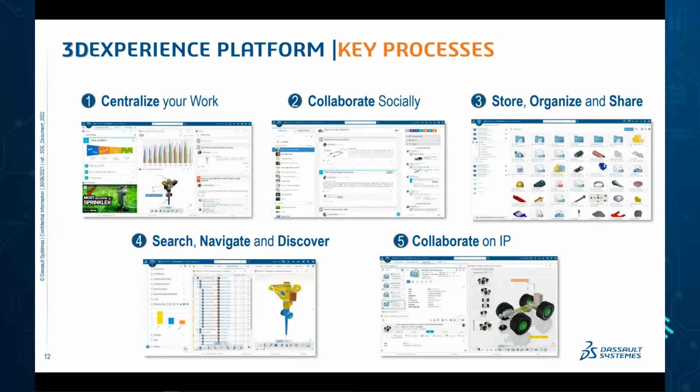But let's focus on how we can now leverage, for example, the 3D Experience to connect the data for simulation. We have been working to enable the connection between CST Studio Suite and the platform, in order to keep track of any changes during the design cycle.

In this way, you can run simulation on a virtual twin, and you can do it in an early stage of your design process.

As I mentioned, we have been working in the past to make the 3D CAD data from the platform available in Studio Suite. We did it for the 3D wire harness, but even for PCB, so you can upload a printed circuit board on the platform and then simulate it through CST Studio Suite, as well as even for electronic circuit behavioral models.

This year, we have been focused on adding material properties, accessing, for example, finite element mesh, but even having the possibility to use abstraction shapes.

Let's have a look at a simple, nice example showing how we can select the data that we want to import. This is a basic antenna substrate and ground that has some holes, for example, for the assembly.

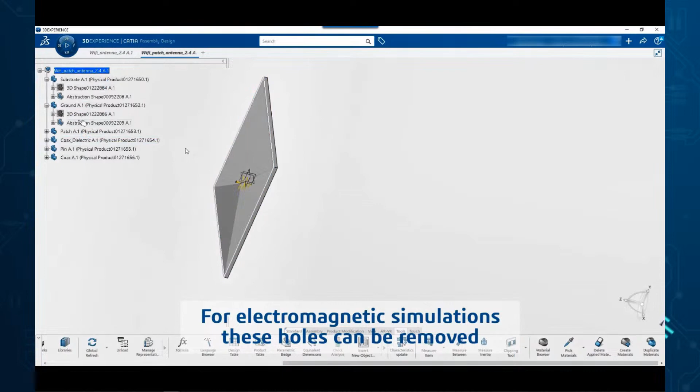For simulation, the holes are not necessary, but you cannot modify your geometry. You may be, as a simulation engineer, not have the right to do that. For this reason, we create a so-called abstraction shape.

An abstraction shape is linked to the original CAD data, but you can add on top of the original CAD data some changes, for example, to simplify the part.

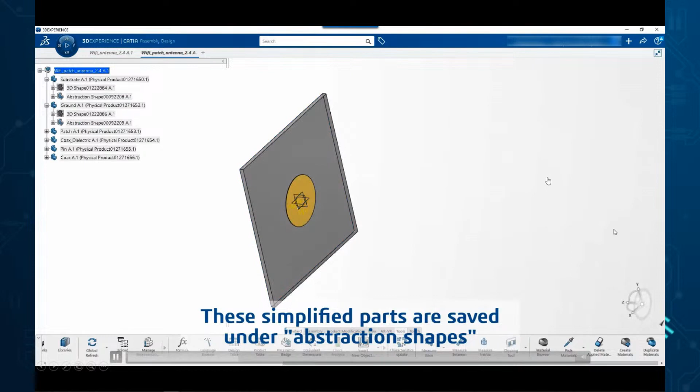On the platform, you can access the different materials. You can, for example, assign to the FR4, to the substrate, and so on. You can assign to the antenna—could be maybe a perfect electric conductor, or maybe a lossy conductor. As you can see, this can be done in a shareable way.

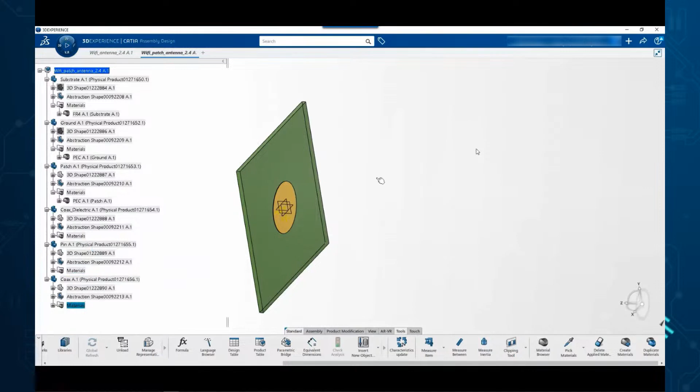Once this is saved, you or a colleague of yours can access that by loading the 3D shape into CST Studio Suite. As you can see here, you can select which parts you want to import and which part you don't want to download from the platform.

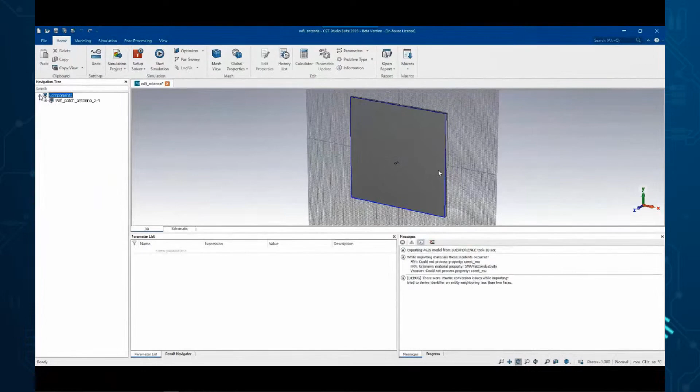So you are connected to the platform, you are accessing the data now—the material, the geometry is there. And of course, you can carry on as you are used to doing with CST Studio Suite.

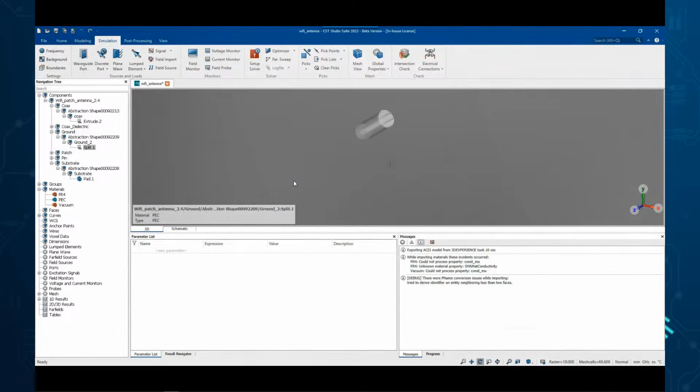You can now maybe select and assign a port, or maybe define first the frequency, assign the port, and run your simulation. So, as you know...

Once the simulation is run, in this case we can just speed up the video a bit. You can look at or watch the results either in CST Studio Suite, as you're used to, or this data can be uploaded back to the platform, and you can use some web-based results visualization.

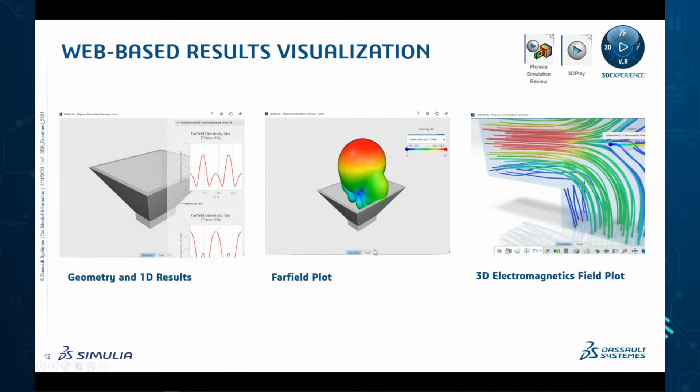We offer a bunch of apps that allow you to look at the results directly on the web. You can watch the geometry, watch the 1D results, but even far field plots and electromagnetic fields.

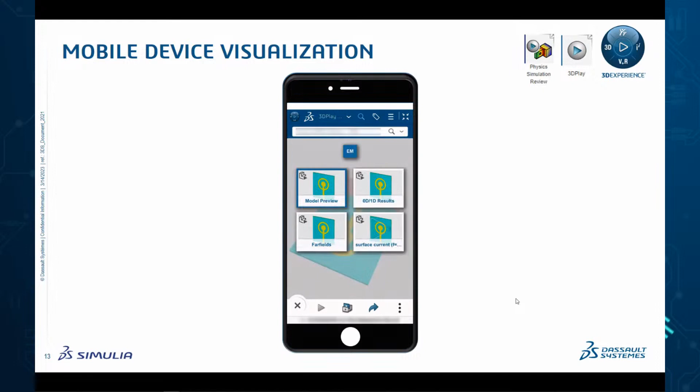These apps are not only available on the web, but even on mobile devices, like your mobile phone or tablet. As you can see here, we have a nice example with a basic patch antenna, where we can access 1D results, and even directly on your mobile phone access far field results.

But let's move now to the first topic, the first bunch of workflows that we optimized. Let's focus on antenna and microwave component design.

Nowadays, when talking about antennas, we are really focusing a lot on arrays. And I think CST Studio Suite is recognized for offering today the best array tools for designing arrays. There have been many updates in 2023, starting with the ribbon itself, which has a new layout.

We give the possibility to define subarrays as well. We have the possibility to better define the excitation in the ribbon and so on, but even to have a kind of parameterization inside the parameterization list—the possibility to select the element you want to simulate, and even to assign or not an enclosure model.

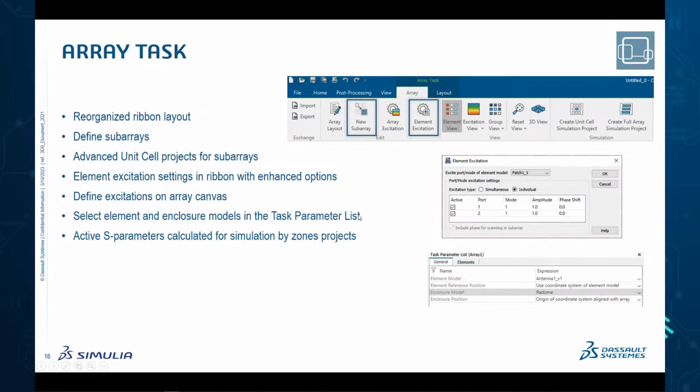But I think it's best to see that in action. We start with the Design Studio project that already has some enclosure and the two antenna blocks. So we create the array and import the layout.

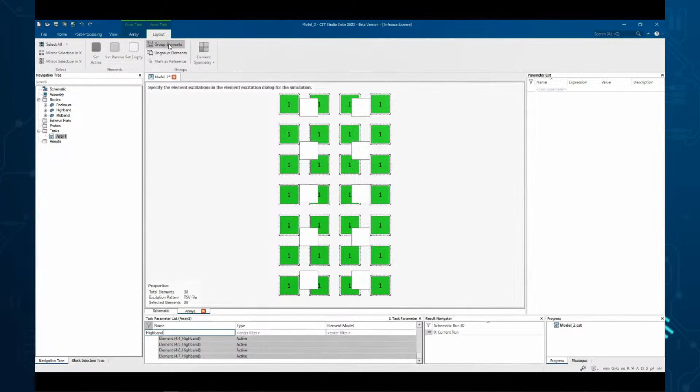Then we switch to the group view and select the multiple model. Here we can group the elements and then select a specific antenna model that is assigned to each group.

When moving to the element view, you can now specify the task in the parameter list if you just want to use one block for the moment. You also have the option to load an enclosure on the radome.

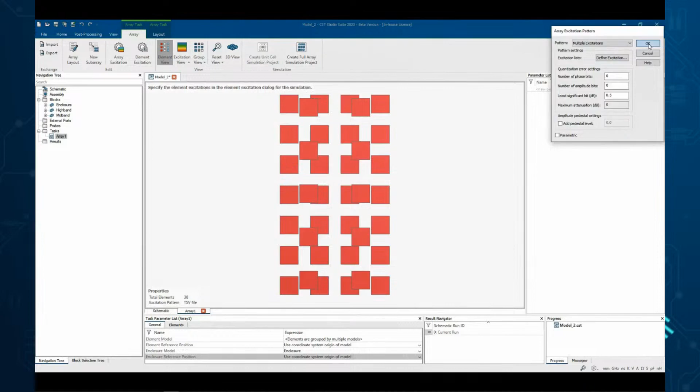So then we move to the excitation. First, we select multiple excitation lists, and afterwards we can decide which excitation list we want to use.

So then we create the full array project by selecting again the elements that we want to simulate. In a few clicks you get the frequency domain, which is the most suitable for that. The project itself has already defined the domain decomposition method, so you don't need to do anything manually - the domains are automatically created.

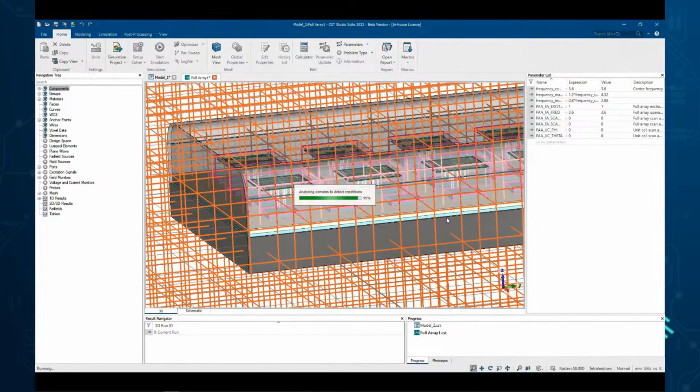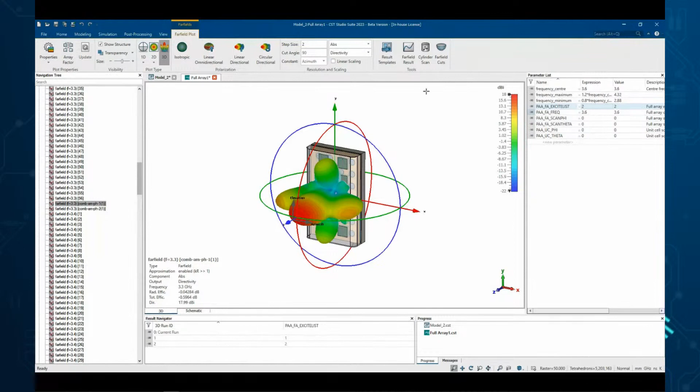So let's start the solvers. After the solver finishes, you have all the individual port results as well as the full array pattern reconstruction and post-processing. You can now switch to another excitation list by changing the index, and you can update the combined results template.

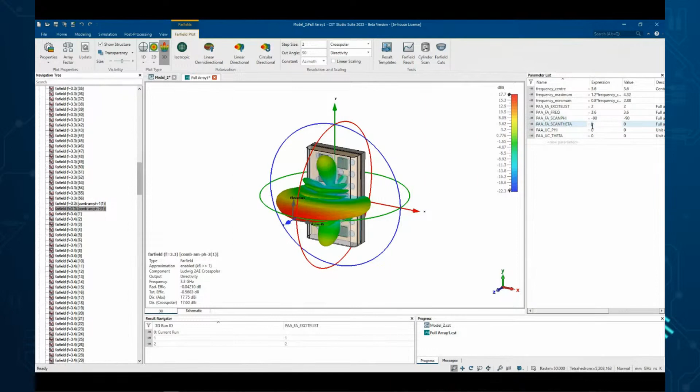And the pattern is updated with new excitation weights. You will also notice that there are now two patterns, so if I switch between co and cross polarization, this is actually a nice capability that you get. Everything is done as post-processing, so you don't need to rerun the simulation.

So we give the beam an angle and a tilt angle by changing the scan parameter, and then we can go back to the array task and take a look at the current excitation distribution as well as the phase distribution.

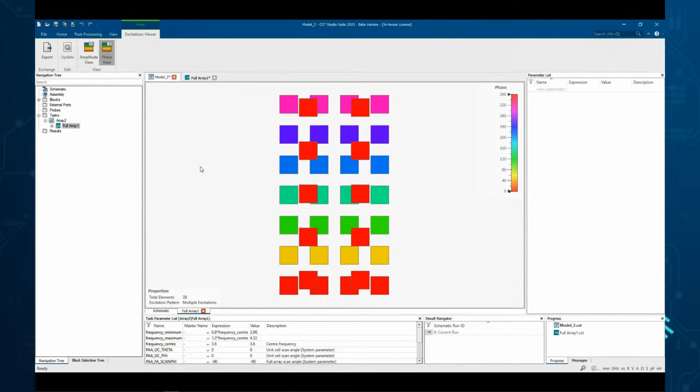I would say extremely complete, very attractive for designers, and in addition we shouldn't forget that we have the possibility to take already some predefined antenna. Our Antenna Magus allows you to start from a single antenna, but even to have some dedicated array pattern.

This year we added a new layout which is non-periodic, a sunflower array synthesis. Why is this helpful? Well, when you have periodic structures, you usually get a problem with the side lobe, which could be pretty high. For example, this is a classical Taylor configuration.

If you use a sunflower configuration, we can already reduce the grating, the second lobe - we get grating suppression - and this can be even improved with the sunflower configuration of the antenna.

Antenna is not the only, let's say, the most important device for communication - you need to have filters and so on. Our Filter Designer 3D, I think, is the best-in-class tool to not only create an initial geometry of the filter, but even to optimize it.

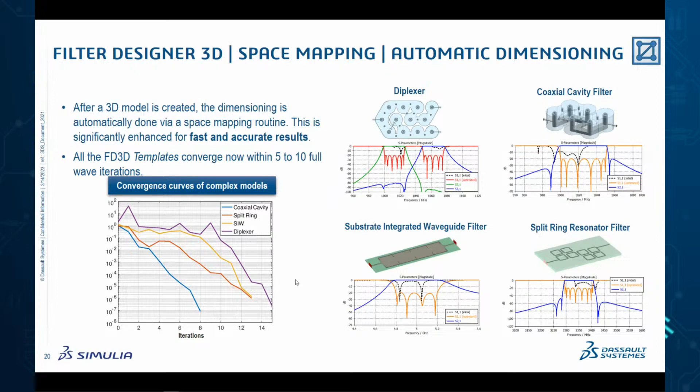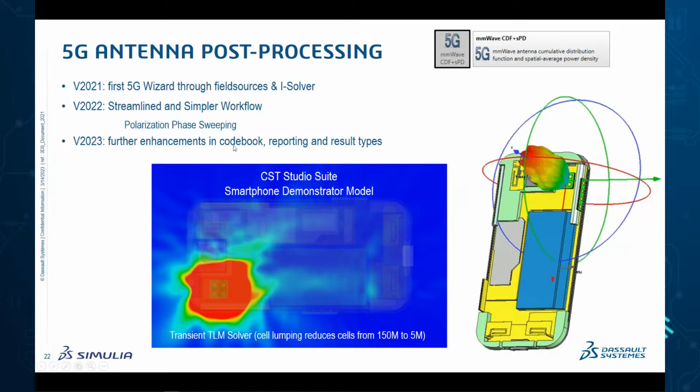Well nowadays, the most important standard is definitely 5G, and to support this we have been developing dedicated processing over the last 3 years. The 5G Wizard has this year an enhancement in the codebook with better reporting and result types.

For example, now you can calculate the equivalent isotropic radiated power, which goes directly into the codebook, as well as the new result template, total scan pattern, which offers a switch of the antenna parameter in the definition dialog. In addition, we have improved the capability to report and offer summary information.

When talking about electromagnetism and radiation, we should not forget that sometimes we need to evaluate SAR, or even do deeper investigation of human exposure to electromagnetic radiation. For that, I think we are the best in class to provide a human model library.

This library is updated every year, offering a variety of different human bodies. Bear in mind this is done in collaboration with the German Cancer Research Center, which has a Human Model Creation Project. These are very detailed models coming from MRI scans, and they are available in the library extension.

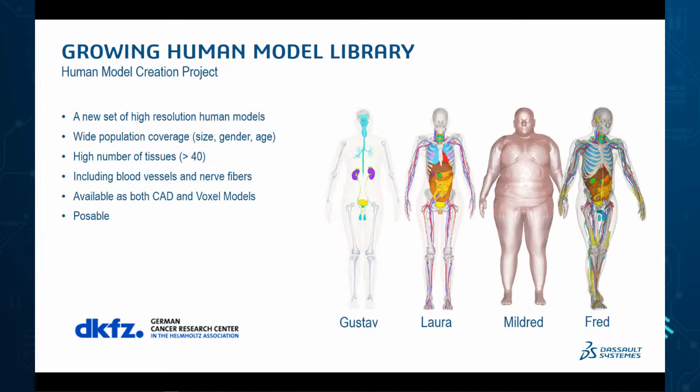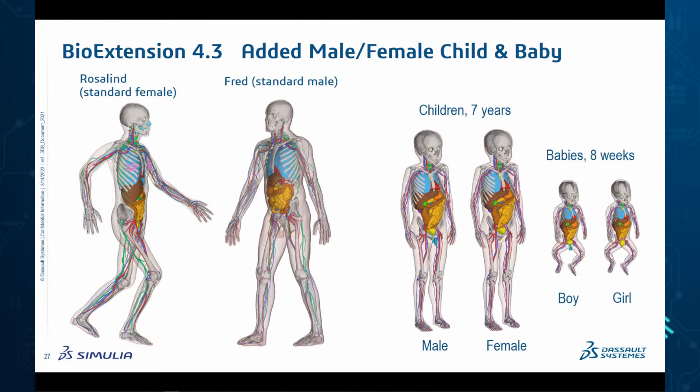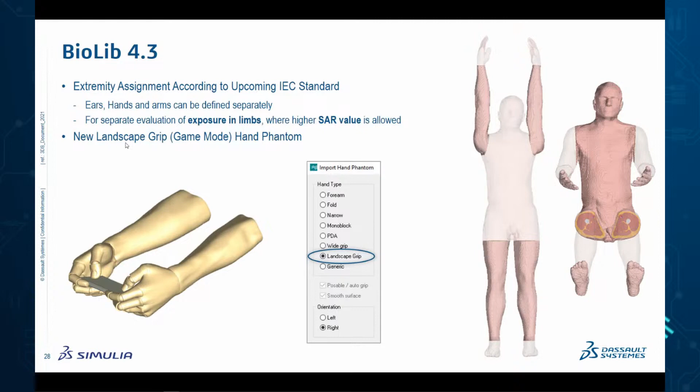This year we added the so-called landscape grip, a kind of game mode that I think is necessary for a proper SAR evaluation. So we have seen how the communication system is designed. We have focused until now on the antenna and filter design, but we haven't seen yet how a network can be planned as well.

I will not talk about public networks, the ones where your mobile phone is connected, but the emerging network, which is the private network.

Dassault is extremely engaged in these topics. I would suggest you visit our LinkedIn page, the SIMULIA LinkedIn page, where we have plenty of demonstrations of our capability. Today, Dassault Systèmes is the only company able to offer the digitalization of infrastructures as well as physical simulation on the 3D Experience platform.

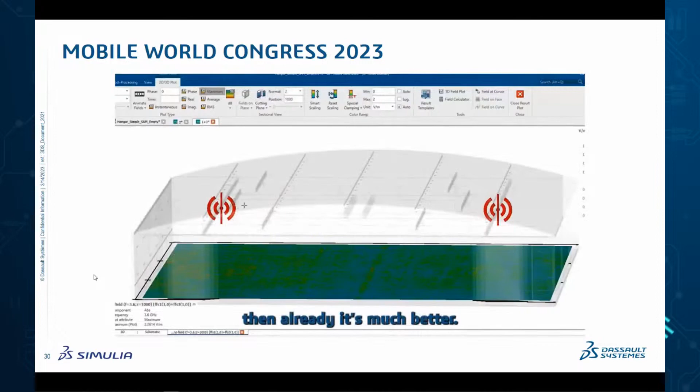Let's assume that you want to create a private network in your company. First, maybe you have to scan, or you already have something that represents your company, your hangar and so on, so that the layout can be reconstructed.

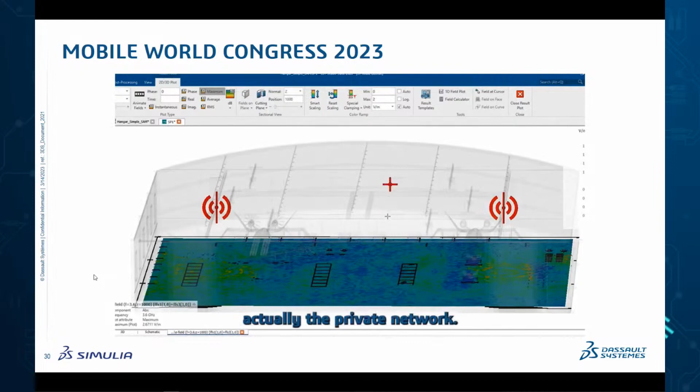This layout can then be imported, for example, into CST Studio Suite, and we can do different analyses. We can place one antenna, two antennas, to check whether the coverage is good enough. You can increase the complexity, and maybe with three antennas it's fine.

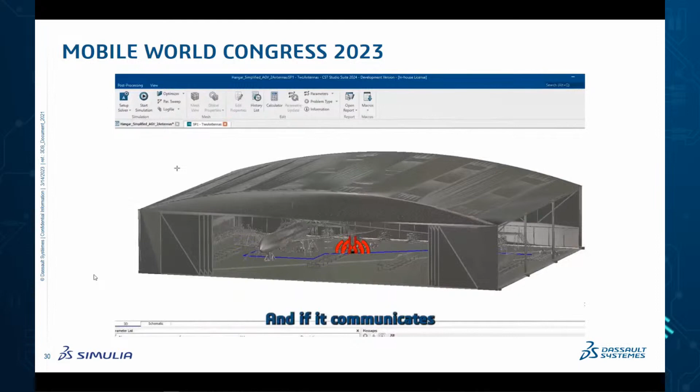But what about if you introduce more details, like a robot? Is this robot able to communicate with the network? In this case we are talking about a real-time network, since you want to really move the robot in real time.

This is possible already today on the 3D Experience platform, on which CST Studio Suite provides the simulation for that. That's why we are working on enhancing more and more the capability to represent a complete scenario, not just a simple model or component like an antenna, but a complete scenario like this.

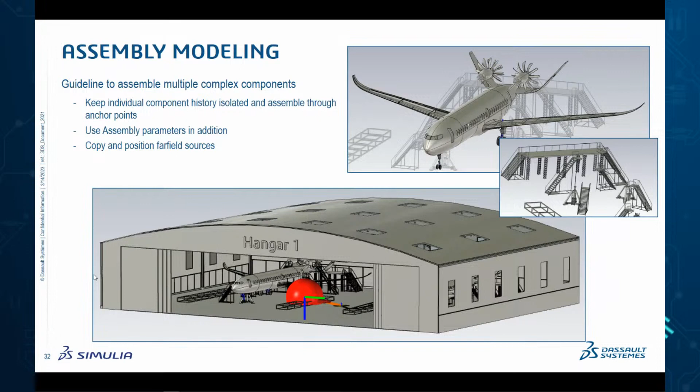You can really have the possibility to represent this in 3D, but even to have a corresponding schematic. Why do we need this double representation? Well, because you want to have a way, from one master, to extract multiple scenarios which can be derived.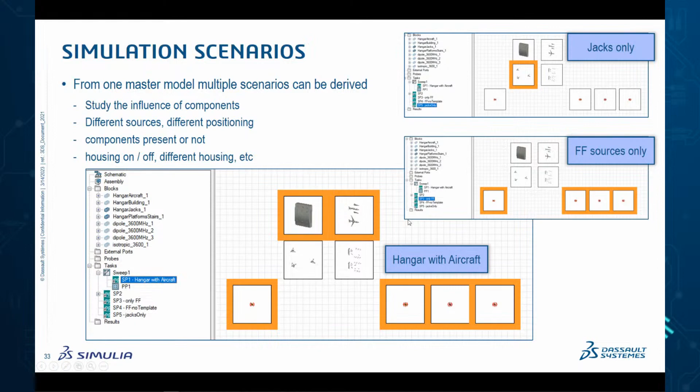You may want to have just the jacks, or maybe only the far field that you want to simulate, or you want to consider the hangar with the aircraft. You simply click on the schematic and you create your 3D structure for the simulation.

Which solvers? Well, definitely for this kind of application, our asymptotic solver is the best in class that the market and technology can provide. It's an extremely fast solver for antenna placement, but even for radar cross-section, for example, and we can support GPU with the latest hardware acceleration.

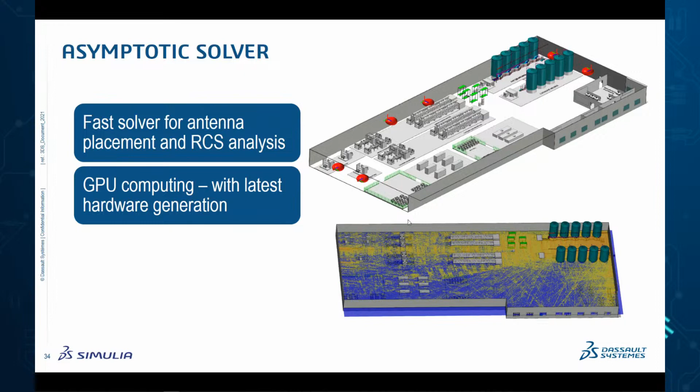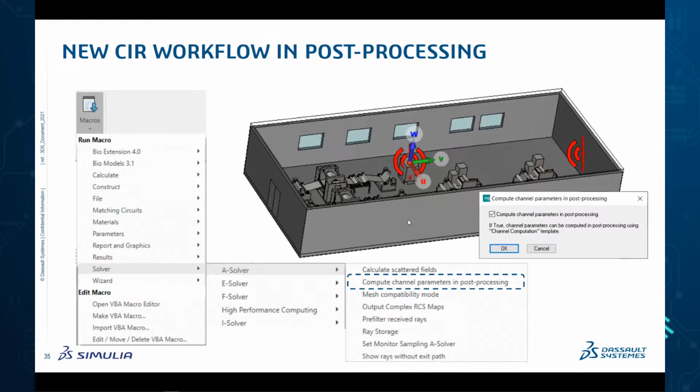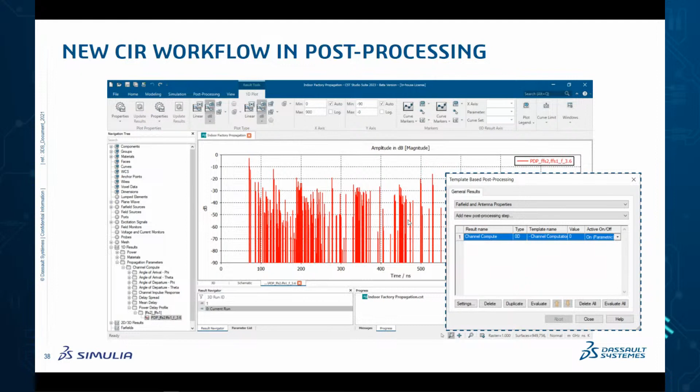Important in this case is the definition and analysis of the channel's impulse response, the CIR. For these reasons we have been working on optimizing and improving the simulation workflows. You can find dedicated scripts that allow you to evaluate that, as well as dedicated post-processing which helps you evaluate the CIR as a combined result. So, very fast and very accurate at the same time.

If we stay in the area of communication and detection systems, we have to consider two things. Antennas are definitely the major actor for that, and we have analyzed that. But if you want to evaluate your antenna in an operating way, you need to evaluate it, for example, on an aircraft, or maybe on a modern vehicle like a car or ship.

That's why it becomes important to have a bunch of solvers that allow you to choose the right one. Maybe at the end of the day, the best way to speed up the simulation is to choose the right solver. But sometimes it's not clear, or there isn't a single best solution for that.

That's why, for many years, we have decided to hybridize them. You don't need to choose one solver to solve everything; you can choose, for example, a model that requires very fine and accurate meshing, and another that considers the whole platform, which may require simulation with another solver technology. In such cases, our hybrid solvers come to the rescue. They can easily combine multiple solver technologies to efficiently handle electrically large structures, and they offer both uni- and bidirectional solutions depending on the simulation needs.

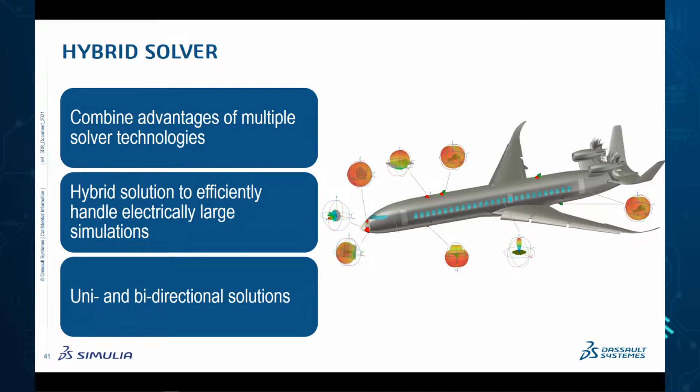In version 2023, we have unified the hybrid solver task setup to get access to the speed of the unidirectional workflows, while keeping the robustness of the bidirectional workflows. The user can easily choose the coupling type from the hybrid solver task parameters list. The coupling is realized using the near fields.

In addition, we now have the possibility to use the hybrid solvers in combination with the schematic. Sometimes when you have an antenna, you need to have a matching network together, and now we can do this with circuit simulation. So we can now hybridize matching networks with 3D inside the hybrid solver. I think that's most likely a unique tool offering.

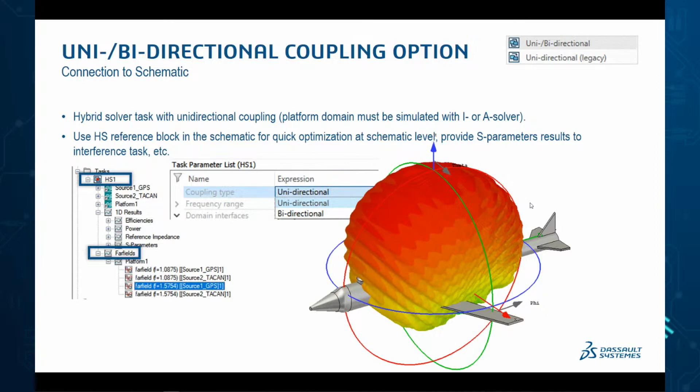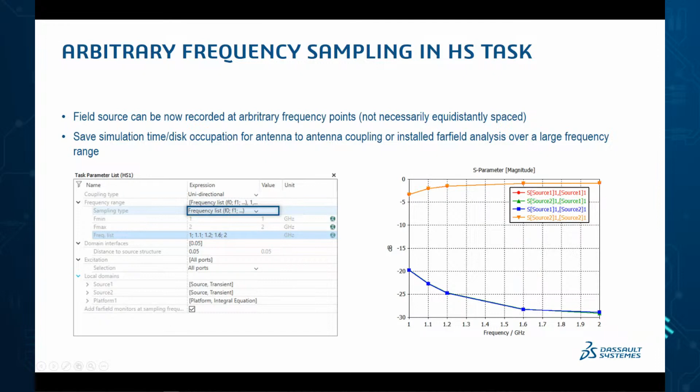What else have we improved for the hybrid solver? Now the field source can be recorded at arbitrary frequency, not necessarily equidistantly spaced. This saves simulation time and disk space for antenna-to-antenna coupling or installed farfield analysis over a large frequency range, since you have much better control over which frequencies you calculate. For example, you may want to refine a particular band in comparison to others.

As I said at the beginning, thanks to the 3D Experience platform, we are able to write dedicated apps which are industry specialized. The antenna placement app, part of the 3D Experience role, is the first kind of app we have developed. It's fully integrated on the platform, so it uses the same data format and directly accesses the CAD model available on the platform itself.

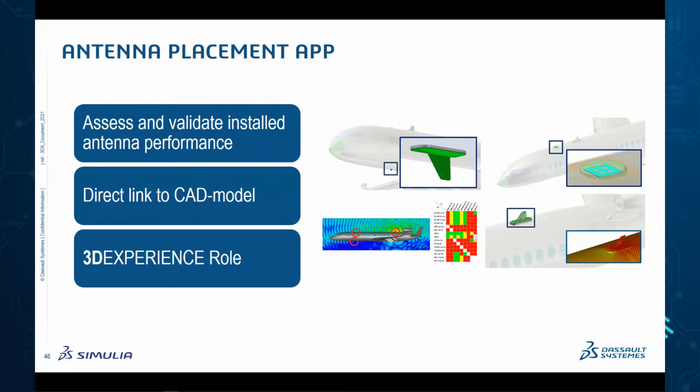This year we have expanded the app with some important features, for example multiple antenna analysis and the coverage test. In addition, we added the possibility to import the airframe, or maybe a vehicle, could be a car, directly as a mesh, so you don't need to remesh that at all.

Let me show you a few seconds of video of how this works. The antenna placement app is available on the platform, on the 3D Experience, so you can import your aircraft, in this case done as a mesh. The antenna is a CST project that you have uploaded to the platform before.

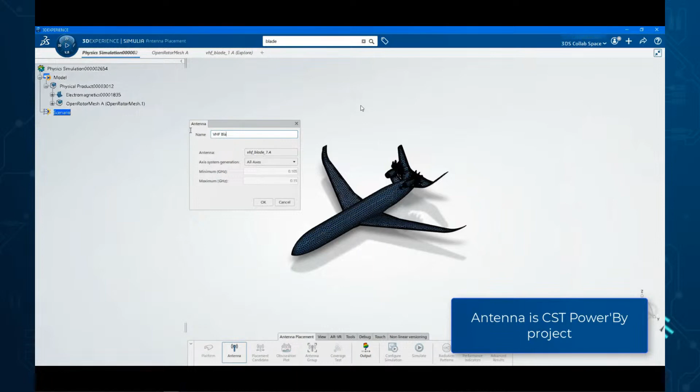You can use different possibilities to place the antenna in different positions, and then create different placement candidates, which can be swept afterwards. You can either position it interactively, as you have seen before, or by defining the position by coordinates.

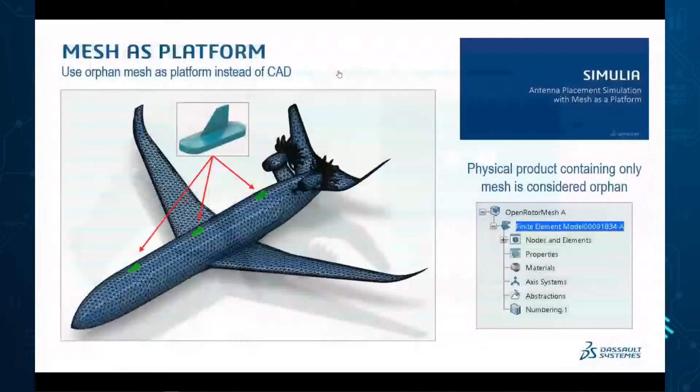What else have we improved? We already had the possibility to define the obscuration plot before. This shows where the antenna is radiating well, and where the platform, in this case the airframe, is causing shadowing of the antenna itself.

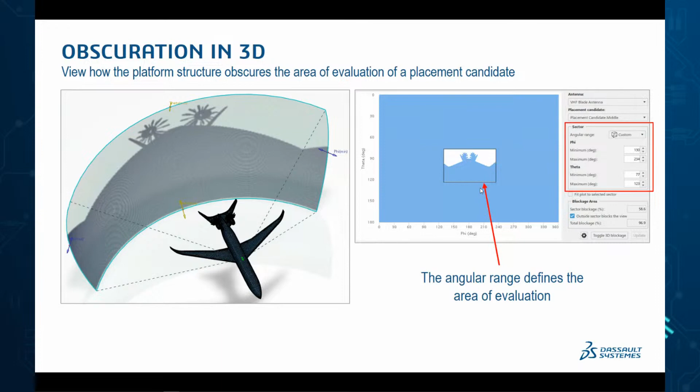We now have the possibility to define a smaller angular range to be more precise in some areas. That's related to the antenna placement and antenna-to-antenna coupling. But this is sometimes not enough to determine if your system is working, because we have to consider the full RF channel.

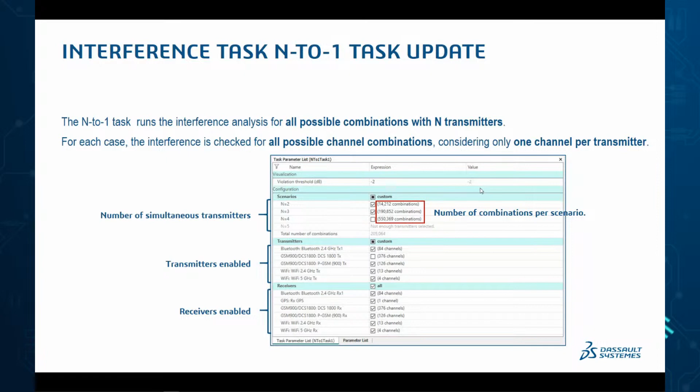To do that, we have our interference task, which provides the possibility to combine the antenna-to-antenna coupling with different RF modules. For 2023, we have intensively worked on the N-to-1 task for the interference task. What does the N-to-1 task mean?

You start with, for example, two antennas transmitting which are interfering with one receiver, or moving to a second receiver, or you can choose another two antennas which are then interfering with receiver one. We can even choose three antennas with all possible combinations with this transmitter, and now all these combinations can be done automatically.

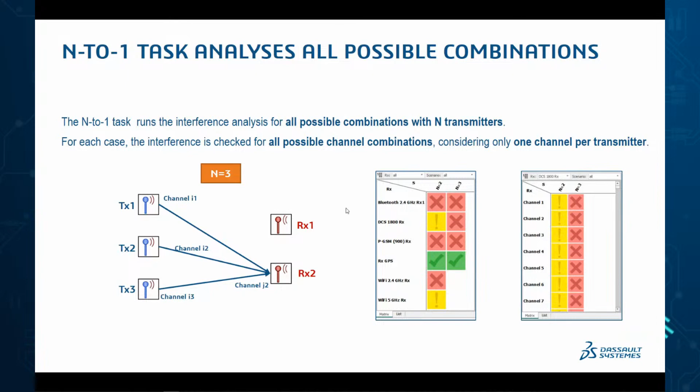For each case, the interference check considers all possible channel combinations, with only one channel per transmitter. So at the end of the day, you can end up with a large number of simulations, but we have further improved the efficiency of the single simulation. It now uses much less memory than previously, as we can see in this example. We drastically reduced the amount of RAM necessary, and even the total simulation time, by up to a factor of 10 in many cases.

So we are able to provide, at the end of the day, a full range of tools for antenna design. When putting the antenna in the array, we can then do the private network planning.

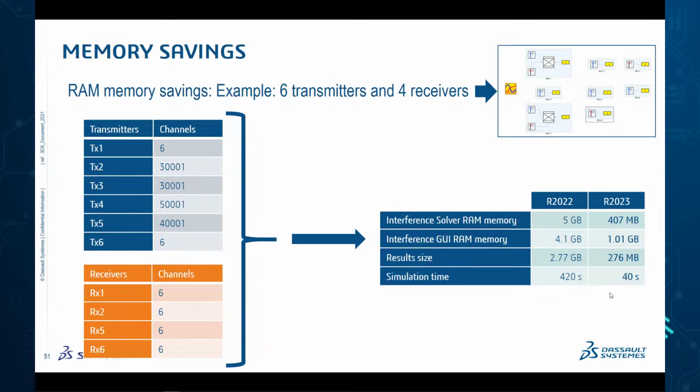We can do antenna placement for a full communication system design by having the interference task to really have a complete analysis for that.

Now let's move to another fascinating chapter of what we can provide: electromagnetic compatibility. We are recognized as technology leaders in electromagnetics. I think for at least a decade, we've been able to solve problems that our competitors are still struggling to do. The focus is not only on enhancing the technologies, but even enhancing the workflows to smooth how to set up an electromagnetic compatibility issue, which usually tends to replicate a measurement setup.

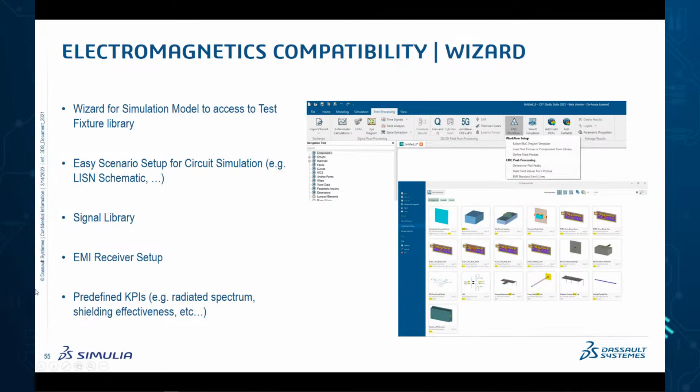That's why we provide, released this year, a wizard. You can go either on the 3D or on the schematic part, and you have a button - internally it's called the EMC button - which gives you a step-by-step tutor that tells you what you have to do. You start from, for example, a template. You can access a library where you have not only 3D models, but even some scenario setups, for example with the LISN available. In addition, we can provide a signal library and even some EMI receiver setups.

Let's see this a bit more in detail. You start with EMC standard limits. You can use some predefined EMC common standards, and this gives you a mask in the results that you can use afterwards to verify your compliance. You can use an interface to mimic the EMI receiver for easy post-processing, and you can easily compare results across different technologies.

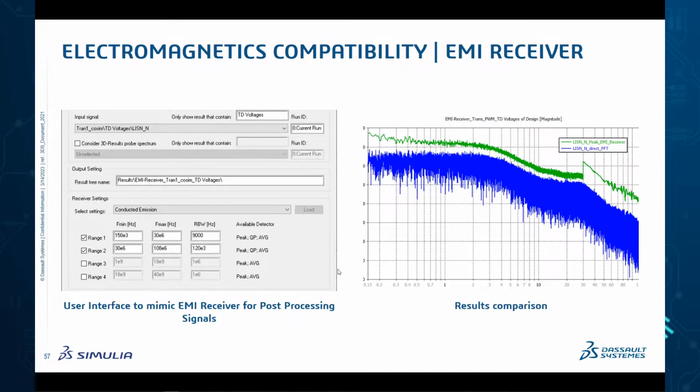When talking about EMC, of course we are talking about electronics and PCB. I think we are really number one in offering ECAD MCAD collaboration, and this year we have enhanced the schematic part as well. So when you import from ECAD - could be Cadence, Mentor, Zuken, Altium, or ODB++ - we are now able to automatize the setting of the circuit on the schematic.

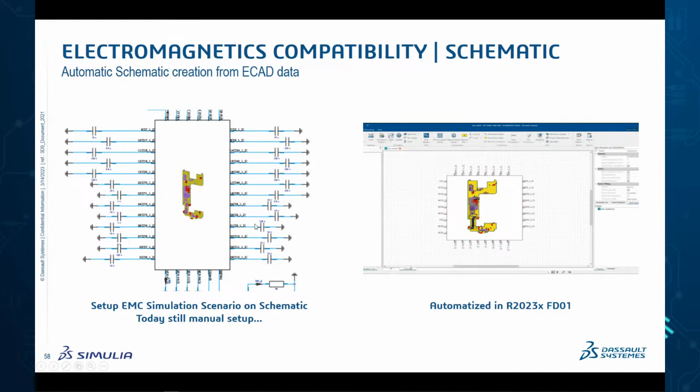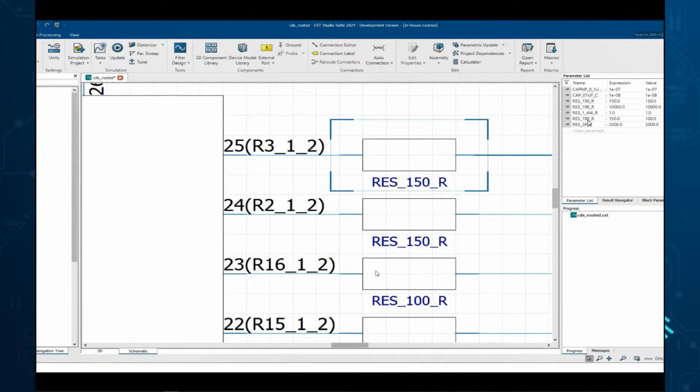On the left side, you see a typical EMC scenario which needs to be done manually - not anymore. Starting with a 4-port block, you have your classical CST block on the CST schematic. The lumped elements, for now limited to lumped element RLC, are automatically placed even parametrically, so you can really do a parameter sweep.

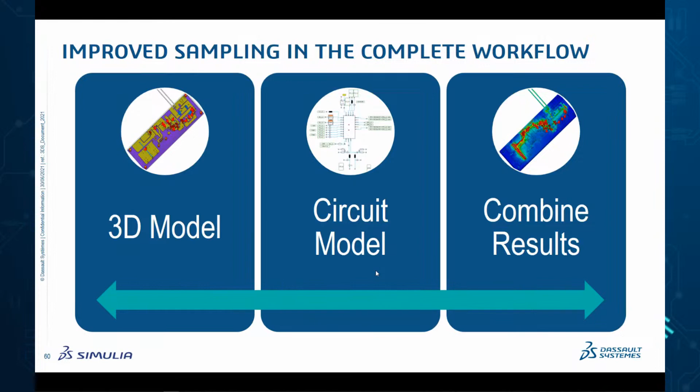We worked a lot on sampling. When moving into electromagnetic compatibility, we usually use digital signals for excitation, and therefore we have to switch often from time domain to frequency domain. Sampling is important, and we have unified the sampling whether you have a 3D model, a circuit, or combined results. When you start with a 3D model, we usually apply a logarithmic sampling at low frequency, and we even try to add some frequency evaluation points at 1 Hz to be very accurate at low frequency.

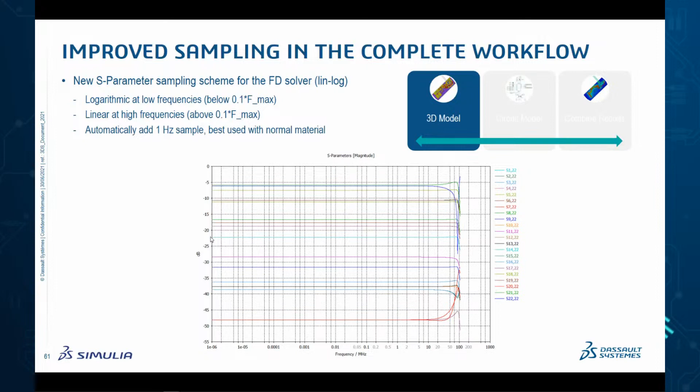Now, when moving to the circuit, we do not resample anymore - this is important, so we keep the same accuracy when doing the vector fittings in Design Studio. We offer new vector fitting settings for the blocks themselves in Design Studio.

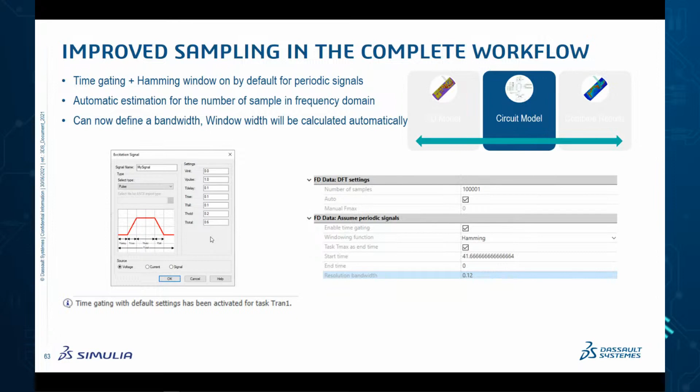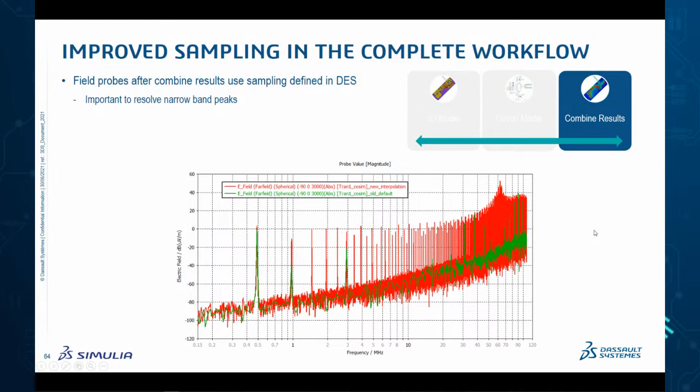When you do time gating, or apply different windows to do the time to frequency domain transformation to calculate the Fourier transformation, we automatically estimate the number of samples you need for a proper evaluation of the peak. Why? Because at the end of the day, these peaks can be quite narrow, and if you don't have an intelligent way of sampling, you may miss the peak or create aliasing. This is a classical problem for both simulation tools and measurement systems, and that's why we've worked a lot this year to make this more stable.

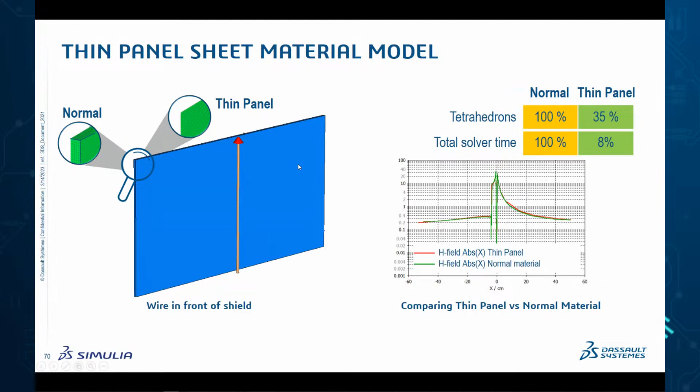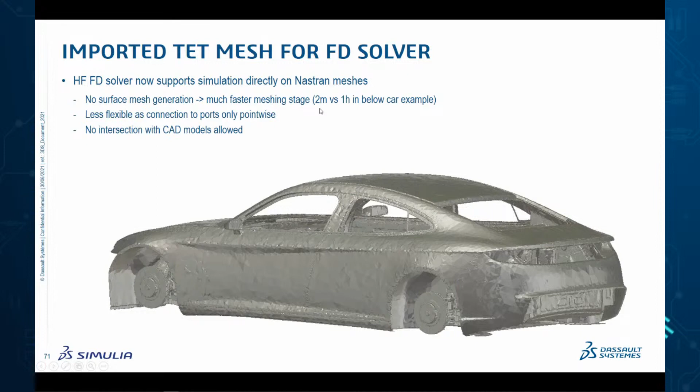Regarding the frequency domain solver, I want to mention two features available since last year that have been made more stable. One is the thin panel, which allows transparency at low frequency for electromagnetic materials, and the possibility to import tetrahedral mesh directly in the frequency domain solver without needing to remesh. In this case, as you recall, this goes from two minutes versus one hour that it took before. We still have some limitations, but we're going to remove those in the next service pack.

When talking about EMC, never forget that cable is usually not a source of interference, but they transport the interference from one point to another of the system. What we did, it's a long time, or well, a multi-years project that unified the way that cable excitations are defined. So it's actually now the same.

So we have a port for cable, while in principle before we were just defining pins. And for you, you can now run cable simulation with true transient simulation directly in 3D without accessing the schematic setup. So you can really do this kind of 3D plus cable simulation in a very efficient way. We reduced the number of pins afterwards on the schematic part, but you can really streamline your workflows by using distributed computing.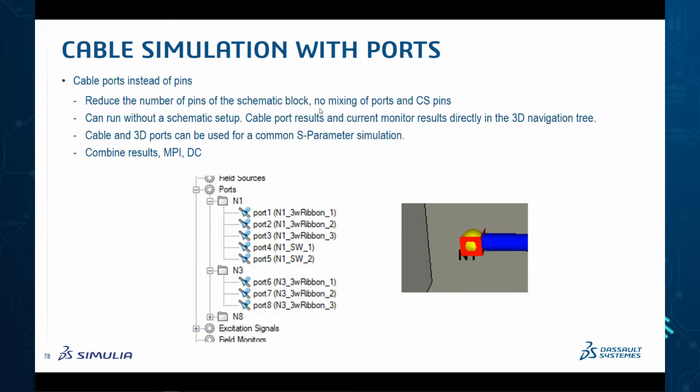You can use combined results, and you can use MPI to speed up your simulation with Cable Studio. So we really streamlined the workflows. There is no difference anymore how Cable Studio and the Microwave Studio parts are now working together. But if you really want to go to an extremely high level, high accuracy, or even set up a thermal analysis, we have a functionality to create 3D cable from the Cable Studio information that you had before.

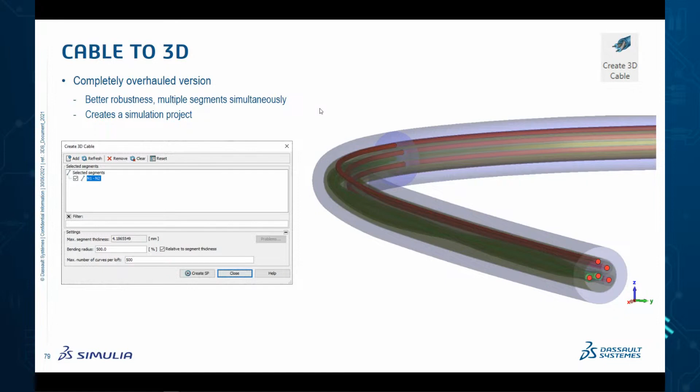Let's move to the almost last topics for today, which is the low frequency and the electromechanical device design.

As you know, our flagship product for the low frequency application is Opera. Opera joined Dassault in 2018, and we have been working every year to integrate more and more Opera inside CST Studio Suite and on the platform. In 2023, we are now able to install Opera through CST Studio Suite, so you don't need to have two different installations. This has a lot of advantages.

So you have a unique license server. You have a unique installation location, but maybe that's the most important thing: now you have an update manager so that every service pack is able to update CST Studio Suite and Opera. So that's a very good way to leverage the best of our tools.

But we went a step further. Opera is the recognized best-in-class tool for low frequency, especially for magnet simulation. And now we can find Opera solvers inside the CST Studio Suite. So that's the CST Studio Suite GUI. Even the electromagnetics engineer can offer that.

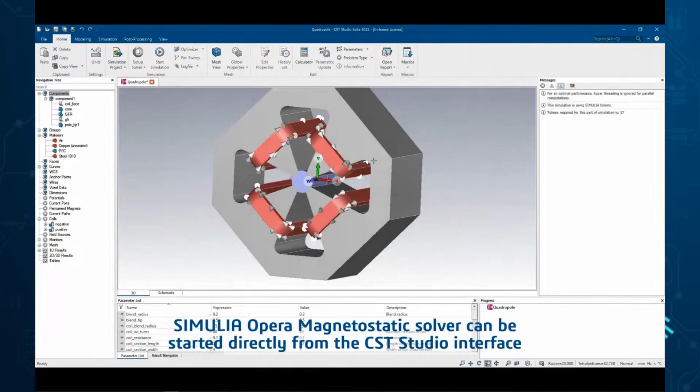We leverage the best-in-class technologies for magnet simulation. You can see this is the mesh, still in CST Studio Suite. And if you go to the list of solvers, you will find Opera, the M-static for starting. So we start, and after the end of the simulation, the results will be available in the CST Studio Suite interface. That's fantastic.

So we are going to offer more and more solvers in the near future, but I would say the big step is to really unify in one single GUI the best solution that SIMULIA can offer for electromagnetics.

But we continue to develop our capability, for example, for induction machines. We added a few new features to enable the simulation. The main problem for induction machines is the fact that, due to the initial transient, there is a slip between the stator and the rotor field, and that makes simulating the induction a challenge. First, the time constant is not known a priori and depends on the operating point, and second, the simulation in 2D needs a field circuit coupling, as can be seen when looking at the typical squirrel cage rotor.

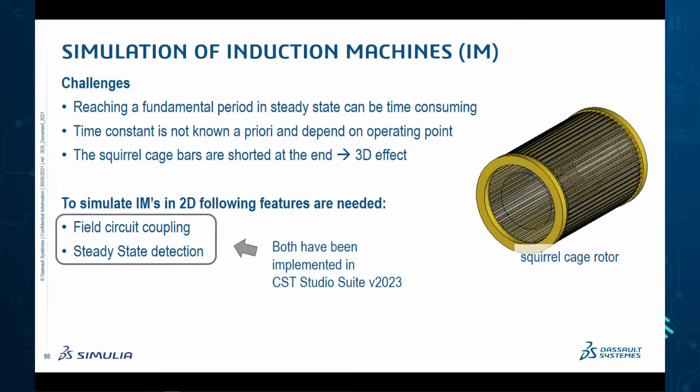What we did - we addressed both challenges in 2023 by developing a field circuit coupling and an automatic steady state detection. So as you can see here, you can couple the cage with a schematic, so we see a circuit with a 3D bar squirrel cage rotor. The vertical bars are simulated in 2D FEM, including the right source for that, and your horizontal segments represent the end rings, which live on the circuit side.

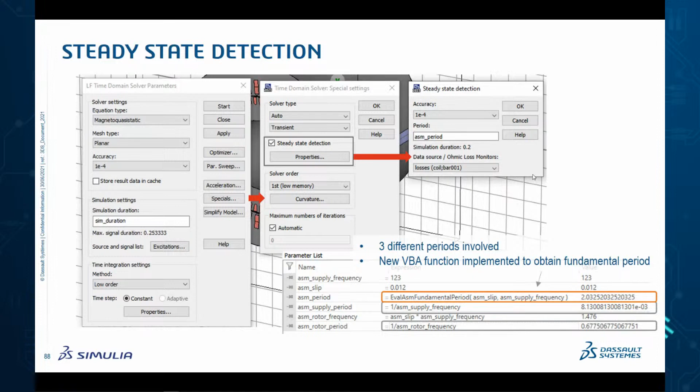And of course, as I said before, we have to identify when the steady state is reached to stop the simulation. This is an additional solver feature. It takes a wished accuracy level, the fundamental period, and a loss monitor as input. So to properly set the period, we provide a VBA command in this case, but we are going to announce a dedicated GUI to have this clearly as a function of the slip and stator's supply frequency.

This is how the results look like. On the top left, we see, for example, the currents of the two bars in green and blue, together with the impressed phase current on one phase, shown in red. One can clearly see the different periods, and on the right side, we see the steady state detection results, which is done after one fundamental period. And the simulation stops when the smooth change of the mean reaches the dedicated accuracy, which can be seen here.

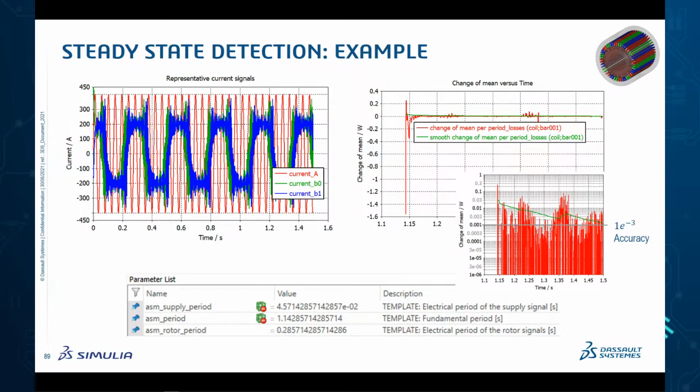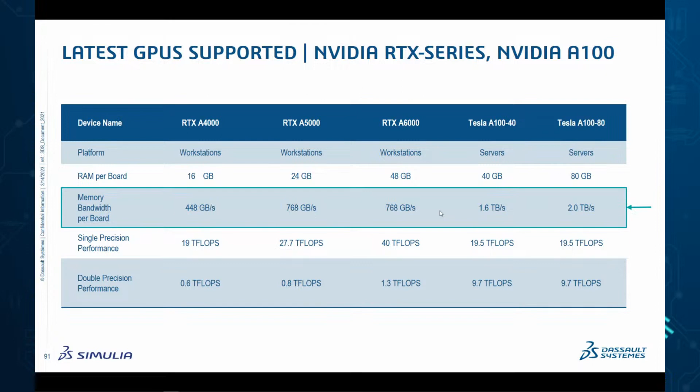But if you want a scalable computing capability, I would suggest moving to the 3D Experience Cloud. This allows you to upload and have cloud computing, so you don't need your own computing system—it's provided by Dassault. To do that, you need an active CST Studio license, you need to buy the All Physics Analyst role, which connects CST Studio Suite to the platform, and then you need to buy a certain number of tokens or credits according to the hardware you want to choose.

We have several hardware configurations to cover the main applications. This is done through the simulation manager, where we support all CST Studio Suite 3D solvers. We support schematic based solvers, for example the hybrid one—not yet distributed computing, but it's coming soon.

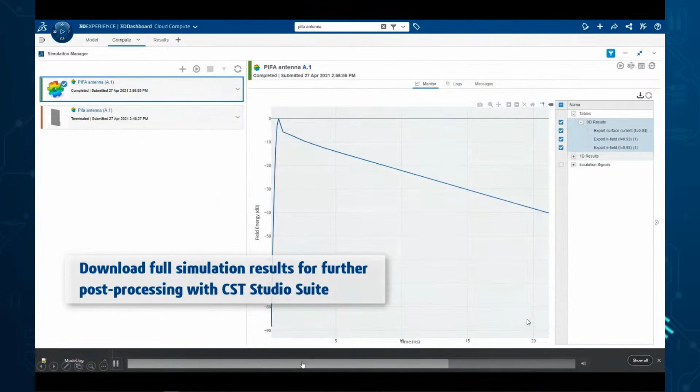The big news is that you can easily set up the simulation scenario, go to the platform, launch it, and see the 1D results on the platform itself. You can even get a lightweight visualization of these results, or download them and look at them afterwards in your desktop version.

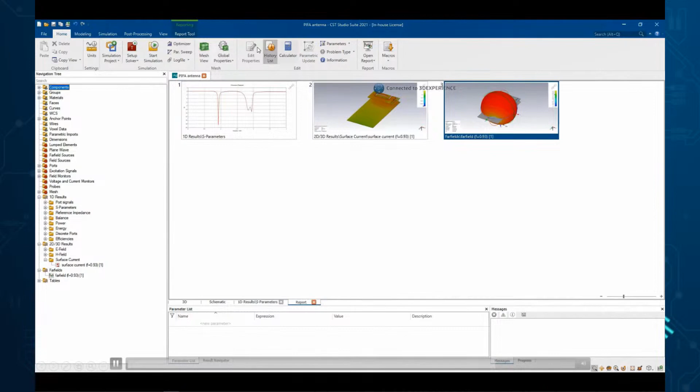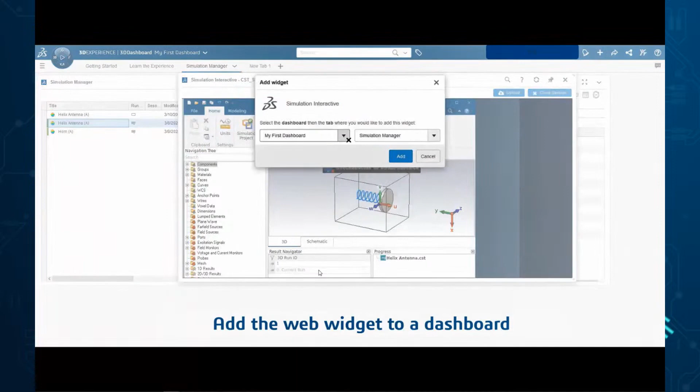But this year we have introduced, for the electromagnetics engineer, the possibility to access CST Studio Suite's GUI user interface directly from the cloud. What you are seeing now is a widget embedded in your web browser—it's not installed on my machine. So you open that, and what you see is really the CST Studio Suite GUI.

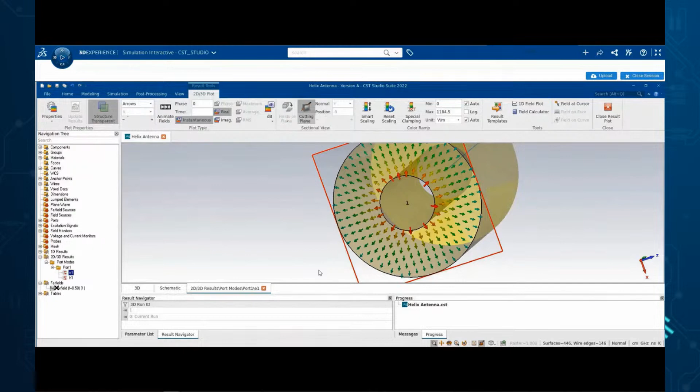In this case we had already set up the simulation. You can look at 1D results, 3D results, and it's really very fast and time responsive. You can do this using the electromagnetics engineer. That's a big enhancement—we provided the post processes as well, and that's a great way to have your experience fully on the cloud.

Before opening the Q&A session, I would like to summarize today's key takeaways. Thanks to the 3DEXPERIENCE platform, the electromagnetics engineer, which connects people, data, and process, you can today use the cloud to remove the barrier for accessing high performance computing, and even allow users to have a unique experience on cloud only.

Our array task has received many enhancements allowing advanced MIMO and even subarray workflows. For antenna placement, we have enhanced our hybrid solver, especially for unidirectional coupling, which supports schematics that take into account matching networks. We have updated performance for the interference task as well. For electromagnetic compatibility, we introduced the wizard, which is the starting point for simulation workflows. And we continue integrating Opera solutions into CST Studio Suite and the platform, on the electromagnetics engineer, with the first version of the Opera magnetostatic solver in the CST Studio Suite GUI.